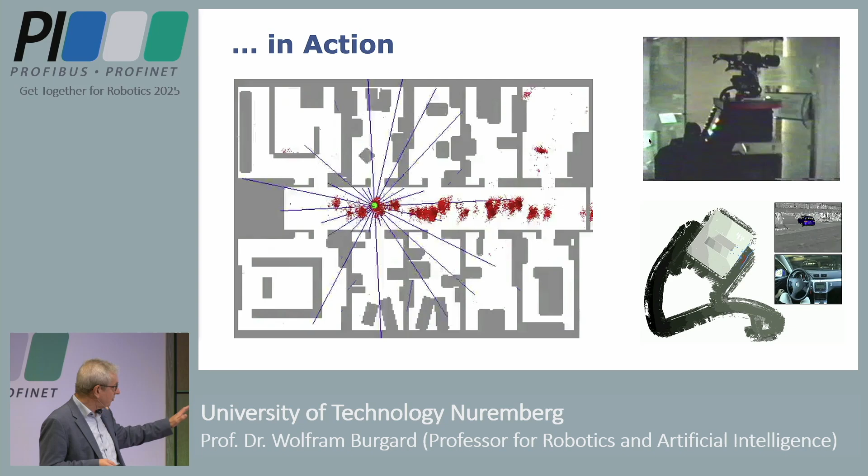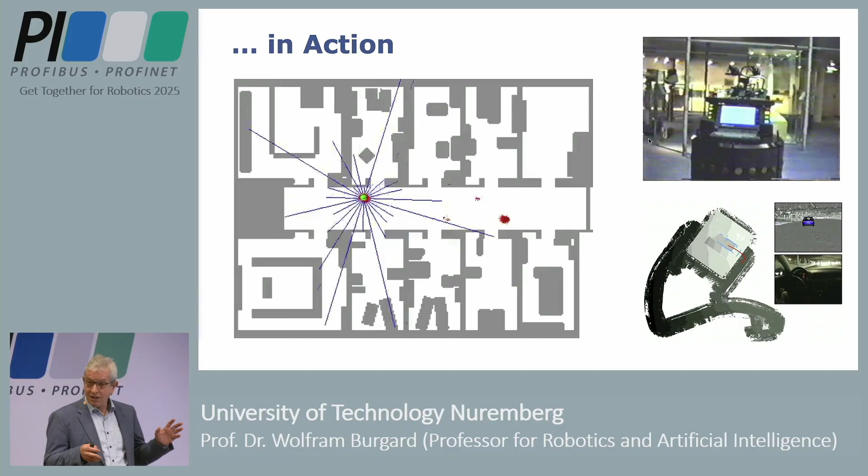Here you see this equation in action. This is a robot that tries to figure out where it is in this environment, or in this map that you see on the left-hand side. At this time we started, in the 90s, with ultrasounds—this was when LiDARs came up, and before that too. Here you can see that robots can actually robustly estimate where they are, even if you don't provide them with any prior information apart from the map.

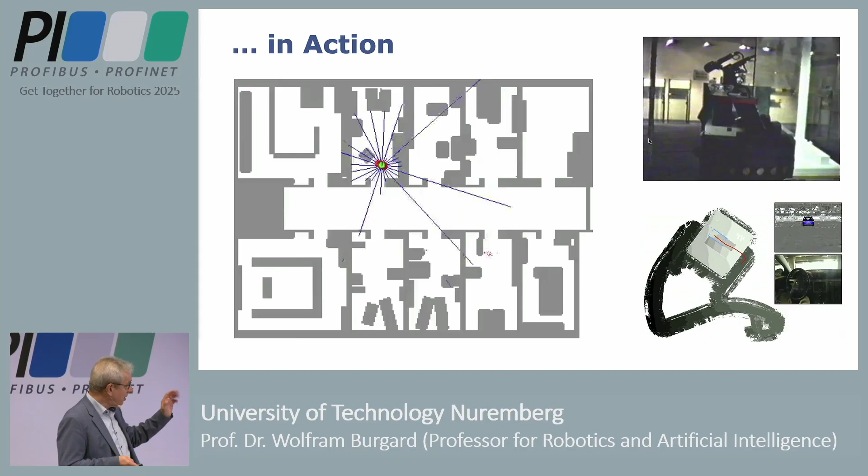The question is, how accurate can this get? This is something we worked on in the past—an experiment we did together with KUKA. They took this technology and built their mobility division. What is this part? I don't know—the mobility part of the company. It's now being sold to China.

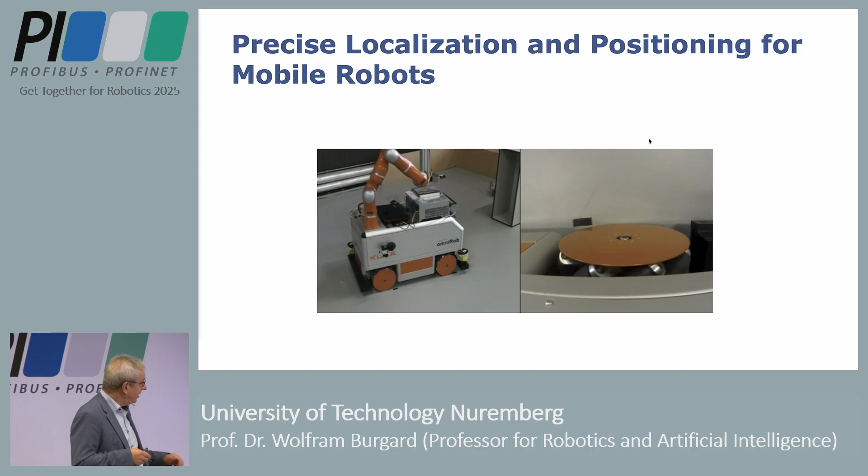Talking about China—when you want to know how accurate this can get, there's an experiment we did at this time with a prototype built for transporting 747 fuselages in Seattle for Boeing. You can see that with this technology, you can get to an accuracy of about 2 millimeters when it comes to estimating where the vehicle is. This was a key enabler for these transportation vehicles, logistics applications, and also self-driving cars.

Google was the first to pick this up, in 2009, and start the work on self-driving cars.

Because this technology basically allows the vehicle to exactly know where it is on the road. If you want to build a self-driving car, there are three things to do: stay on the road, don't get hit, and don't hit anything. When you can accomplish this, you get really, really far.

But this is actually the basic technology and something that is in most self-driving cars and driver assistance systems, and this equation that you saw before runs even in your cell phone.

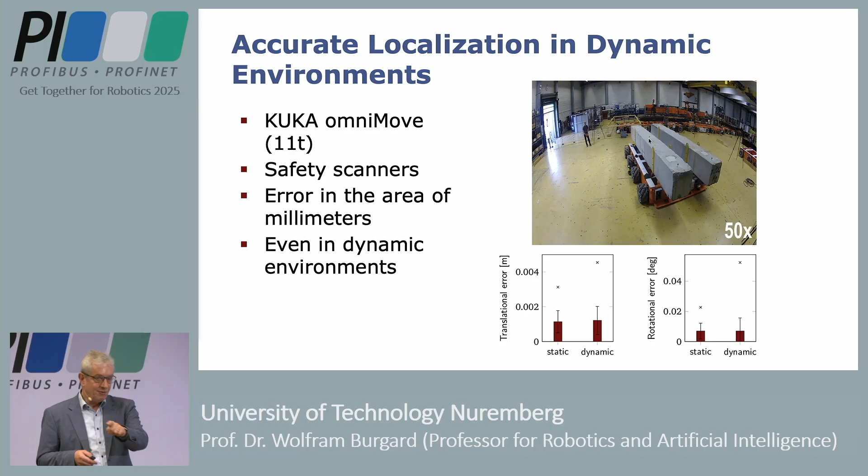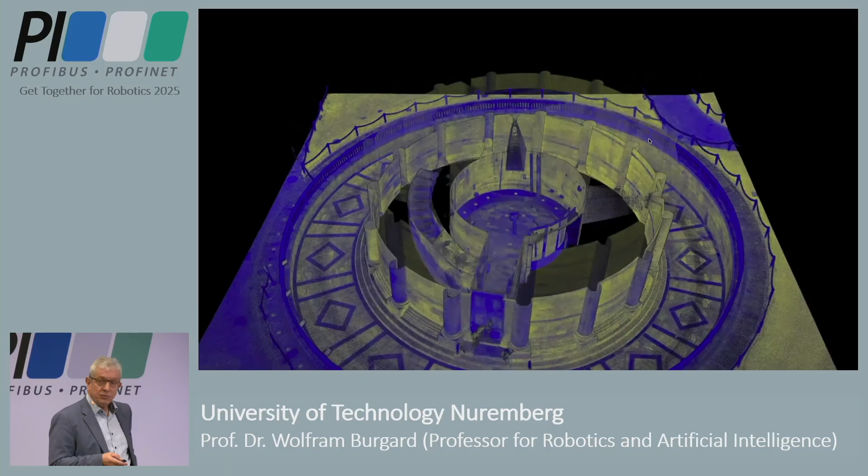You can also use this for building maps. Just to give you an idea, this is a startup of mine in Freiburg, and we are using this technology for building highly accurate maps of real estate buildings. This is an indoor-outdoor model of the Leaning Tower of Pisa, one of the most accurate models of this building available right now, and you can use this for navigation and also for real estate.

It's obvious, but things might go wrong. Think about weather changes: cars basically use road markings, poles, lamps, or traffic lights, but under certain weather conditions you don't see any of these features anymore, at least not the lane markings. This might lead to the car losing track of its position and ending up on the sidewalk or wherever. This is the fact that we're using maps which are extremely expensive to generate that's a barrier to level 5 driving, and that's why we don't see self-driving cars here in Erlangen.

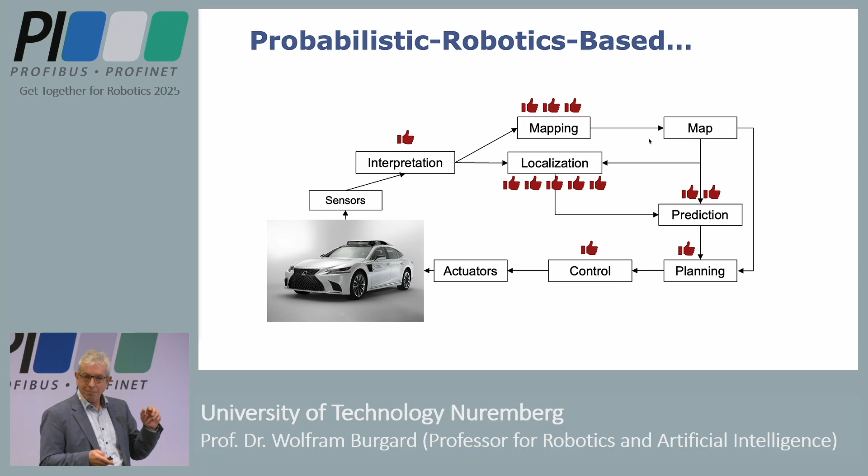The problem is that they only estimate what we call the maximum likelihood. You get this image, but for pose estimation you need these probabilities, and deep networks are particularly strong in these boxes. When you look back at the probabilistic approach I showed before, there might be a chance to combine the two to get even better cars. This is what we worked on in the past. In this equation, what you see are probabilities, and these networks don't necessarily provide you with probabilities, so this is where research was needed to make that happen.

But then there was more, right? Recently these foundation models came up, and when I first saw them, I was actually blown away.

So my experiment was like, I'm a robot standing in front of a doll, my user asked me to pick this up — where should I grasp it? And then ChatGPT gave me the answer. It always comes with bullet points: first, use the arms, the torso, or the legs. Basically it means don't grasp it at the head.

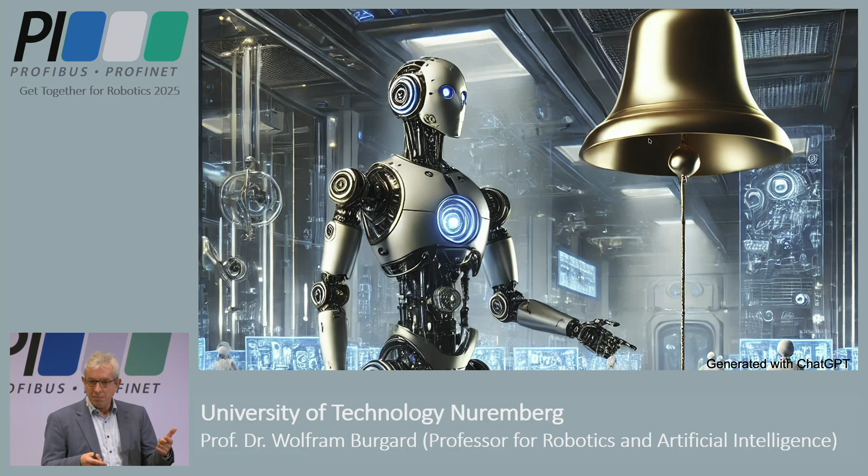We actually need to realize that we are at an inflection point right now. This technology will be a key enabler for future robotic systems, in particular when it comes to ease of programming, flexibility, and better understanding of the world. A few examples in a few seconds.

There are two approaches right now: using foundation models, and building foundation models for robots. I'll talk about the first one here. Let me go back — this video should auto-run. Come on, one more, forward.

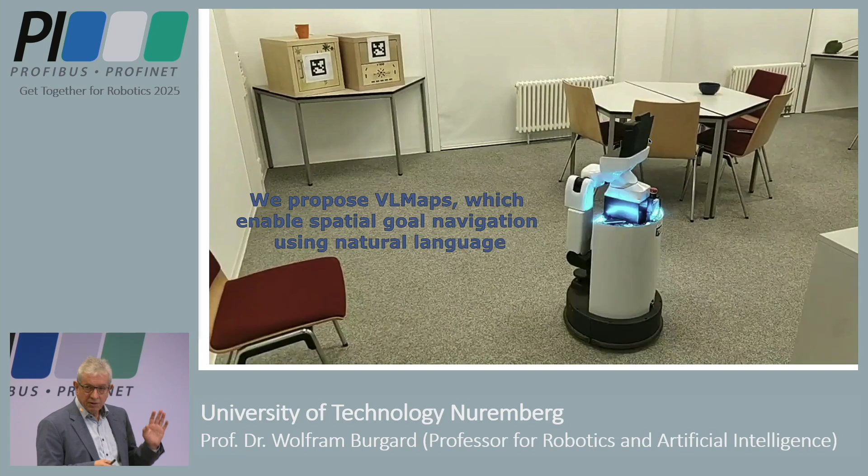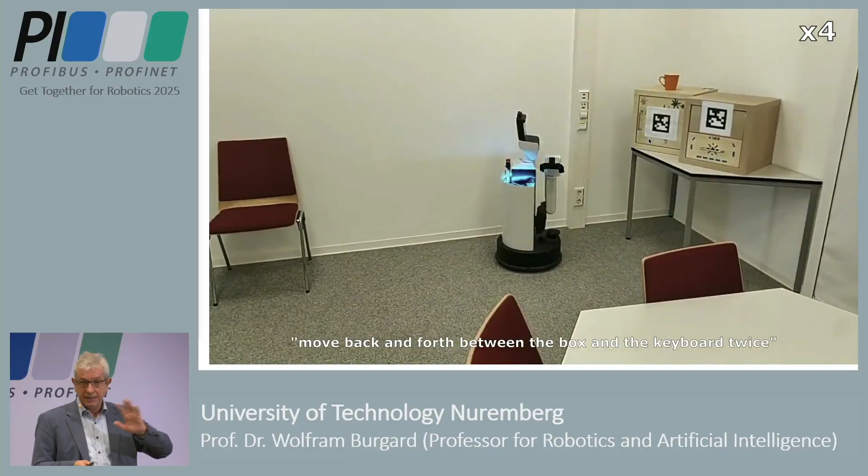This is an experiment, a paper we worked on a few years ago. We basically enabled the robot to navigate an environment based on language commands — you see these instructions at the bottom. What we have here is a 3D voxel grid in the background, and in each voxel there's what we call an embedding, basically the representation of these objects in the deep network, generated by the foundation model.

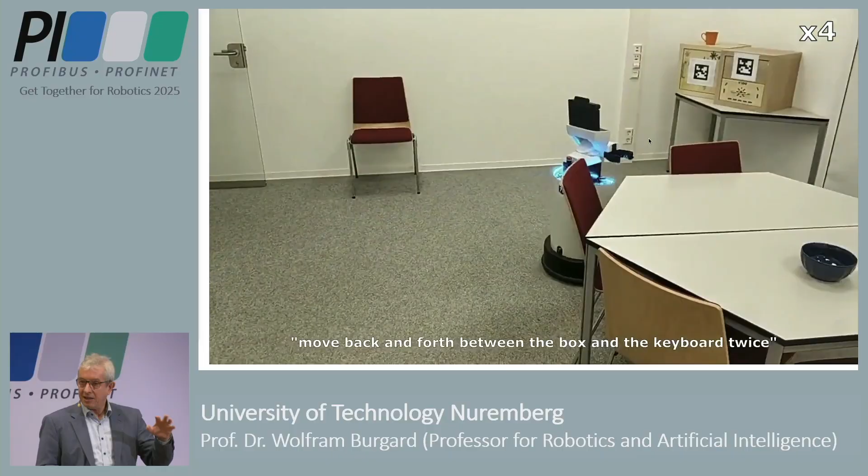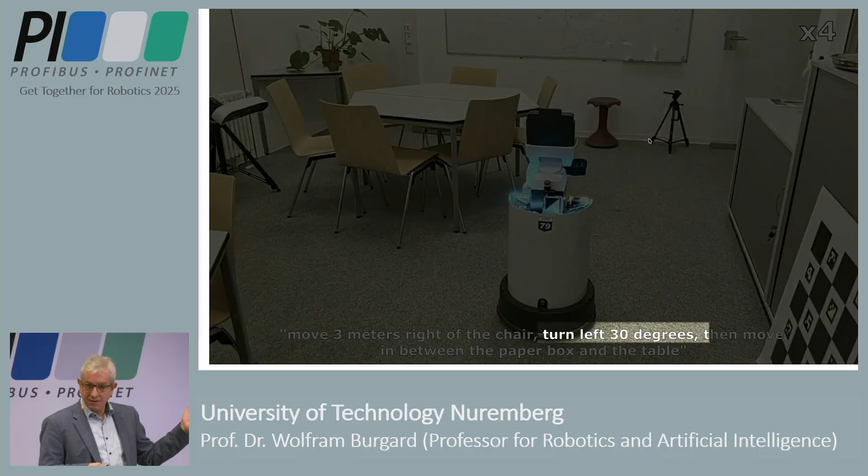Once you have this, you can, in a zero-shot fashion as we call it, without any training, tell the robot to go to the keyboard, or move to the right of the chair. If you look at scientific publications in the computer vision domain, there are hundreds and thousands of papers about detecting chairs in images. And here it comes out of the box, zero-shot — you can even say go to the plant, or go to the keyboard.

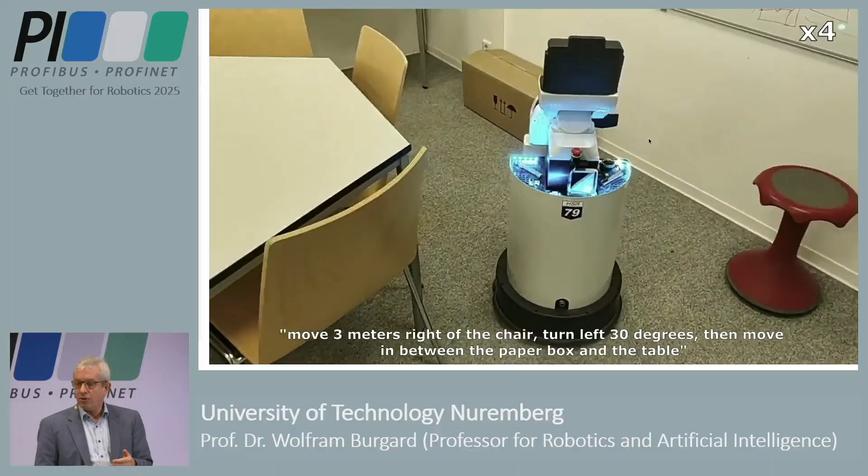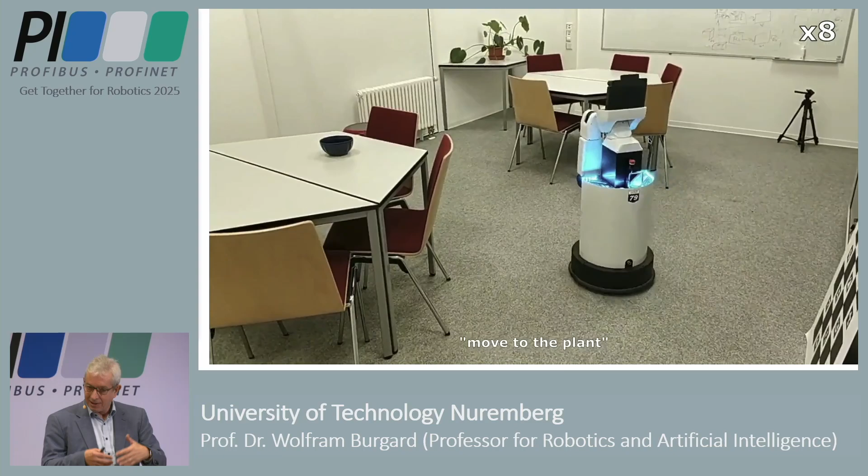That's something you saw before. In former days I used to say that every one of these objects was a PhD life — you instructed a PhD student to solve the problem of detecting plants, and then you had five years and a few papers. But nowadays you can get this basically for free out of these systems.

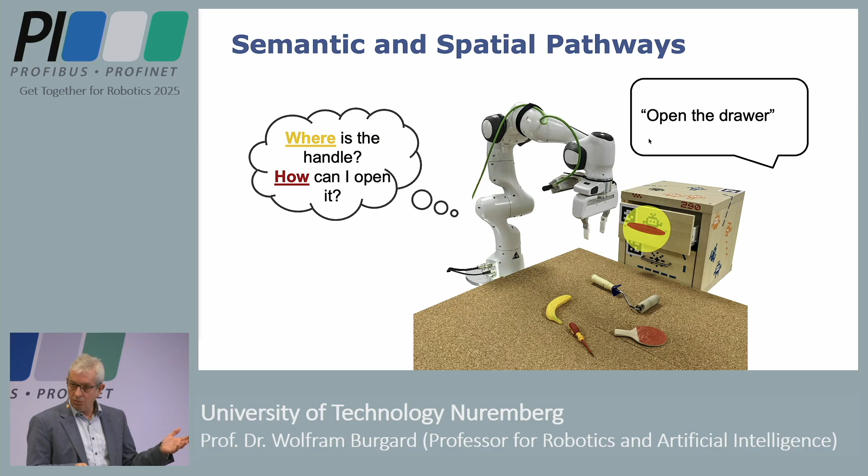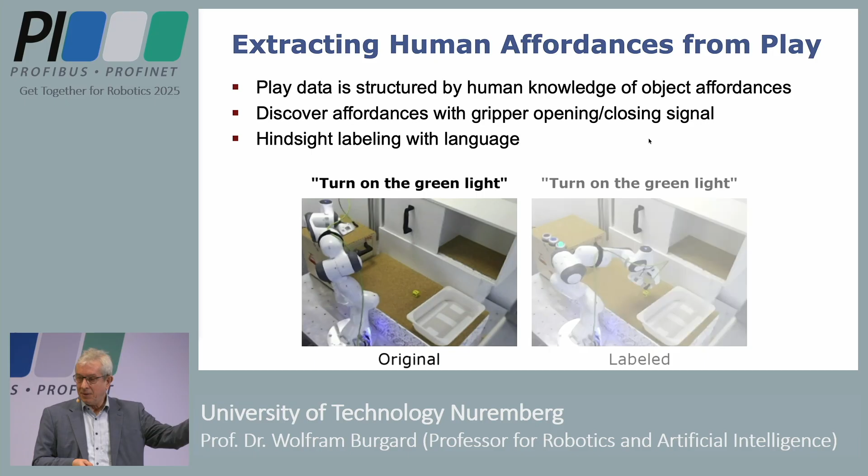This is Oier, one of my former PhD students, basically teaching a robot to perform elementary actions like picking up a cube, putting it into a drawer, opening the drawer, closing the drawer. These actions are then annotated with language, and this enables us to tell ChatGPT: here's what I can do, here's a scene, tell me how I can solve this problem. So this is the background knowledge that we add.

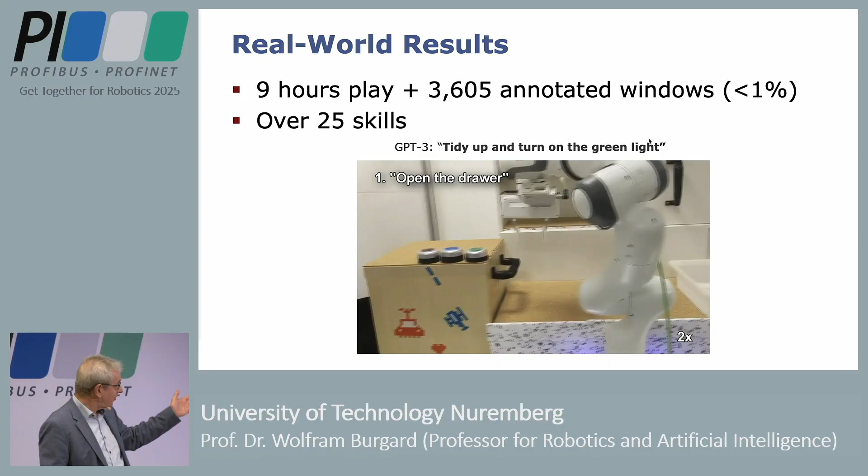This is me telling the robot to clean up the desk, what I typically do with my students. The language model generates a program out of it, which is used to execute the actions. Here you can see tidy up and turn on the green light, and the robot executes this action sequence generated by GPT-3, just based on demonstrations.

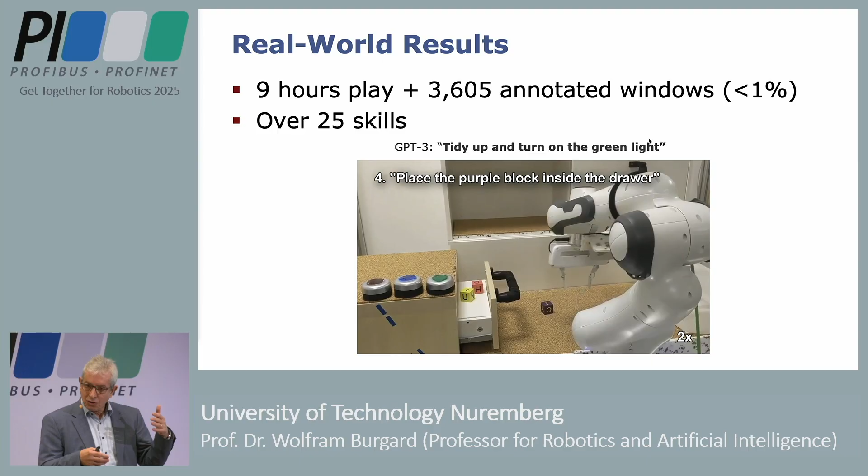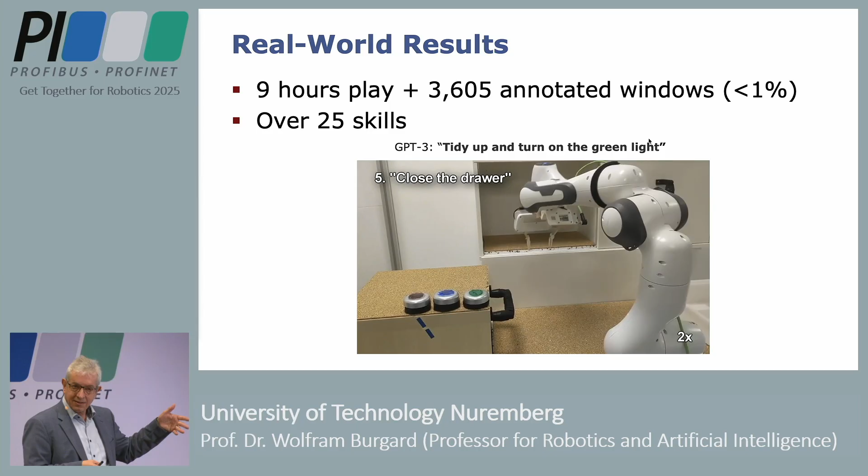The idea behind all of this is programmers are extremely expensive, and if you want to bring robots into the real world, in particular for SMEs, they don't have the money to pay expensive technicians or robot engineers. This technology is an enabler for efficient and flexible programming of robots doing tasks that have not been foreseen at the time it was built.

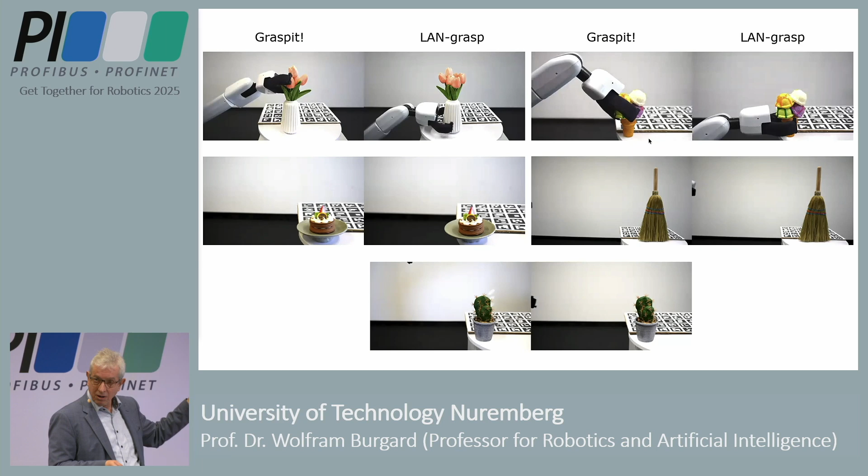Here's the grasping example. We're asking a foundation model where it should grasp the object. On the left-hand side is always a state-of-the-art geometric planner. You give it the geometric model of that object, and it finds these flowers super great for grasping because they are huge, but it doesn't have any understanding of the semantics.

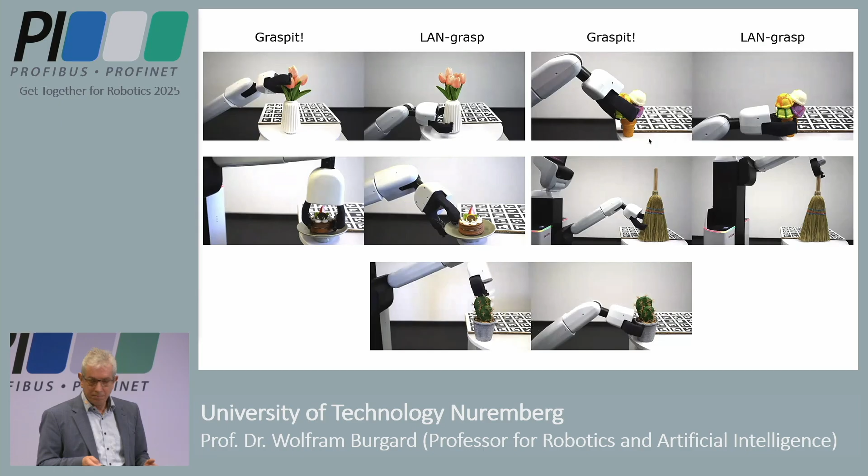On the right-hand side is the language model grasping. The cake also looks pretty good for picking up. You can go even further and ask it about more complex objects, like when it sees a cup with a broken handle, it needs to grasp the body, and when it's dirty, it doesn't grasp it at all.

Here's one of the coolest things we did recently. You might ask how this runs on edge devices, since we know foundation models run on super huge computers in the cloud. The way we did this is we trained a small model based on the policy generated by the foundation model and ran that on the edge device, which is a vacuum cleaner, training it to avoid things it shouldn't suck up.

You can buy a robot that avoids this, costing several hundred dollars more. The engineers who built it trained a deep network to classify these plastic things in order to execute this on a real robot.

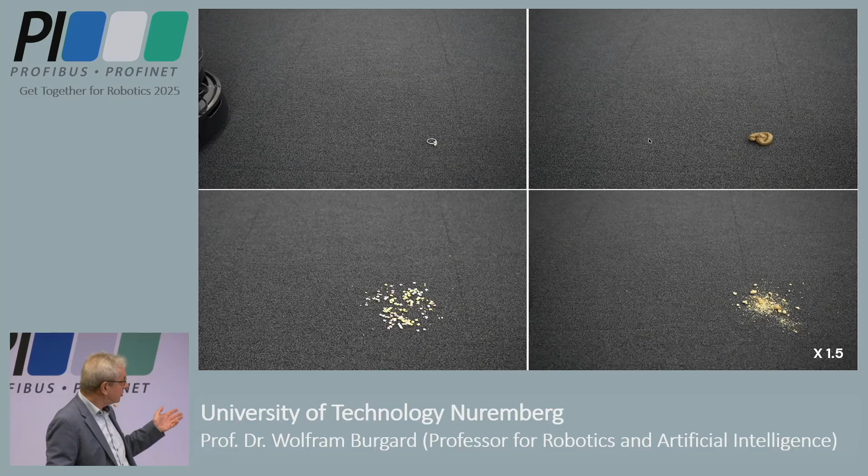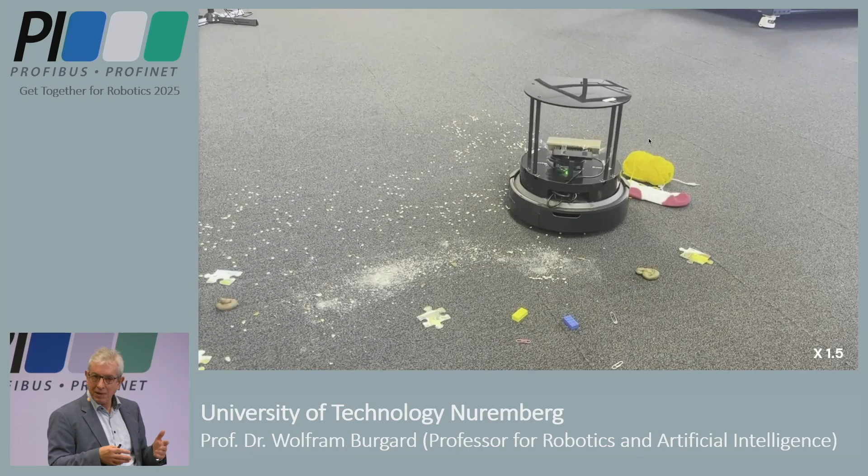Here we took the policy from the foundation model and trained a YOLO V8 from it, and this again is zero-shot, what you see here. It's not a real vacuum cleaner, that's why it leaves the dirt on the ground, and it's also better for making experiments, but you see it avoids all kinds of objects that might be harmful for a vacuum cleaner, out of the box, for free.

You can continue with this, and we have many more examples. You can do zero-shot action execution of policies in the real world. But the key challenge is actually building a real foundation model for robotics.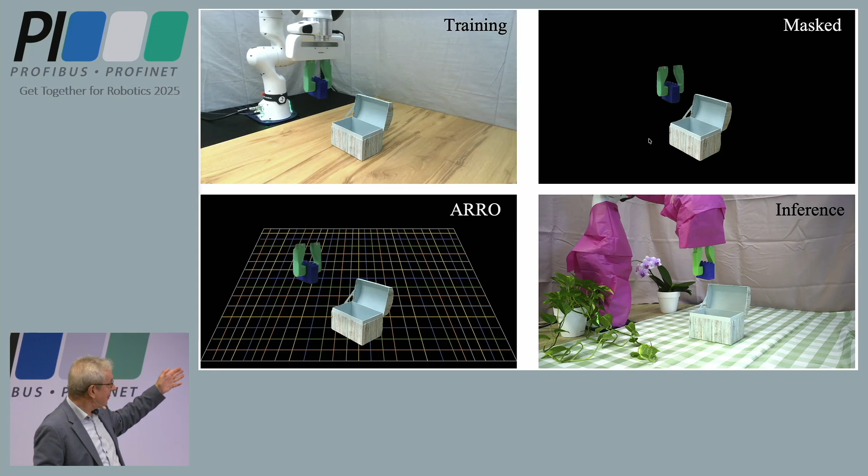That's why the robot has such a beautiful color. You can basically see that during training you have a completely different robot than you see during execution, and this is done by this abstraction through this foundation model.

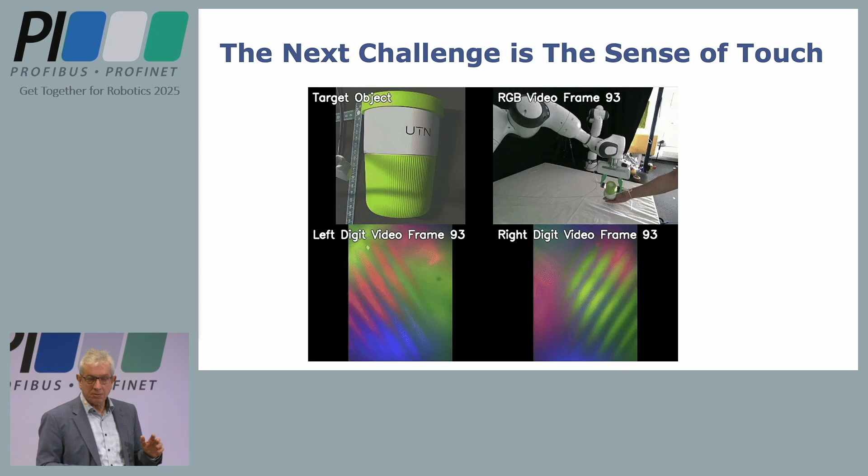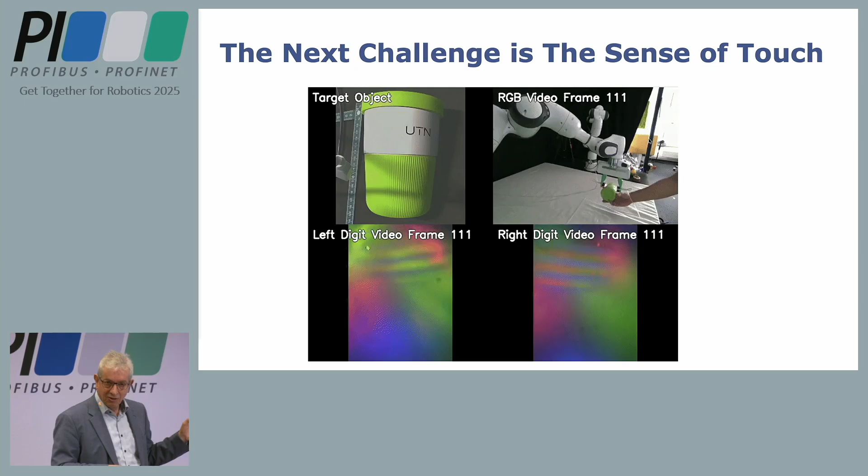I want to stop here. The next big thing, which is actually missing and why we need our own foundation model research, is that if you want to build an embodied system that acts in the real world, you also need the sense of touch. Right now, foundation models can only talk, or generate and understand images, but there's no such thing that understands the sense of touch. To properly grasp and manipulate objects, you need to understand how the world feels. This is what's missing, and why we urgently need a foundation model for robotics that includes exactly this.

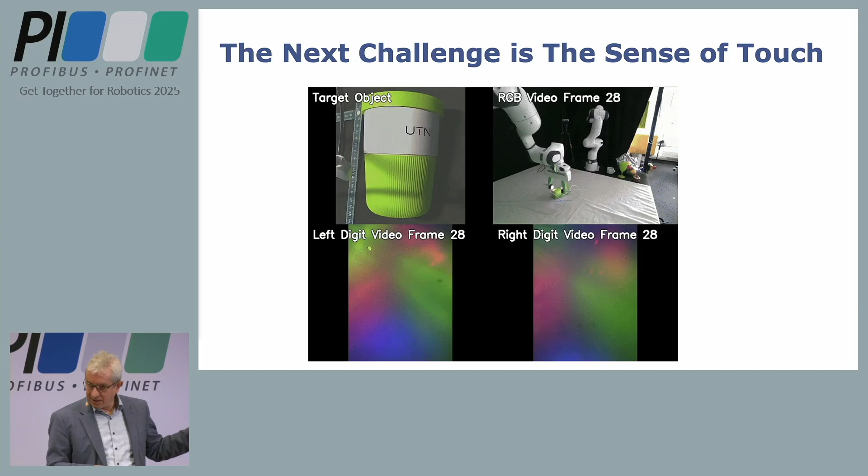There's new sensors coming up right now on the horizon. When I was in China two weeks ago, there were 120 startups in the space of humanoid robots, and equally many in the space of building hands with the sense of touch, because they realize this is exactly what's needed to take the next leap in robotics.

With this, I'm done. What I want you to know is that these three techniques are key for building intelligent and truly embodied systems, and that in the end we need to build a foundation model for robotics to take the next step.

As you know, our state minister for research, Markus Blume, is working on this gigafactory initiative, and Siemens is also being invited. We will have a workshop in two or three weeks here in Franconia, where we hope Siemens will also be involved, so we can jointly build a robotics foundation model that takes us all to the next step in robotics and production.